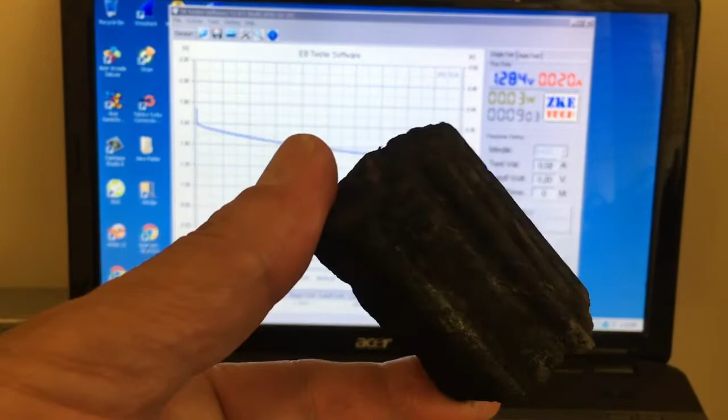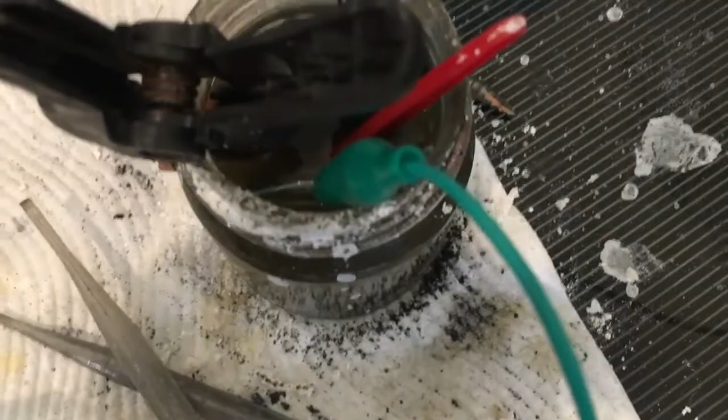This is one of those red-hot charcoal fired briquettes. I put these on top of the feather carbon when I was making that, to stop the fumes, so it would have urea and feather carbon fumes all the way through. I took a hacksaw and sliced the piece right down through here to make an electrode, and I was trying to zinc plate it. I jammed it in the old cell, the original liquid. It's got no separator or anything, just a piece of zinc plate on the negative and that cookie connected to the clamp.

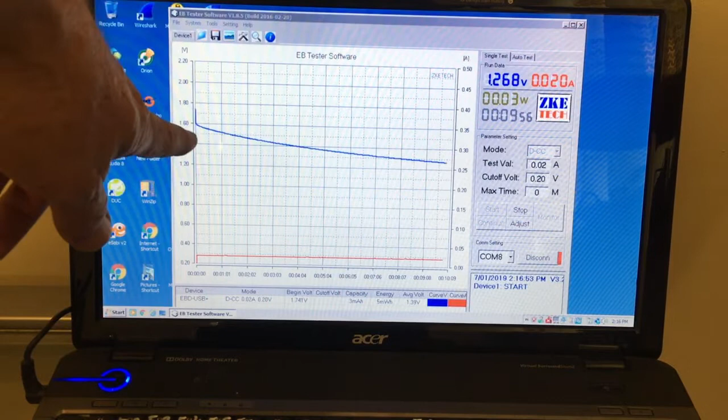I gave it 20 minutes of electrolysis to plate it, then went back to this other cell here to give that another go for charging. It stayed at 1.7 volts. I connected a 20 milliamp load, it dropped to 1.6, and it's currently going for 9 minutes. It's at 1.2 volts.

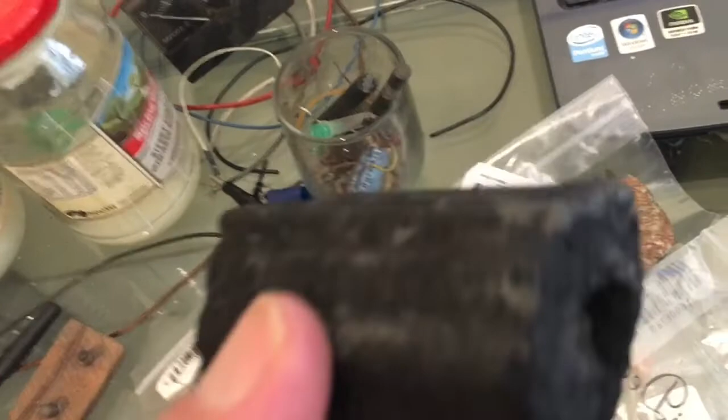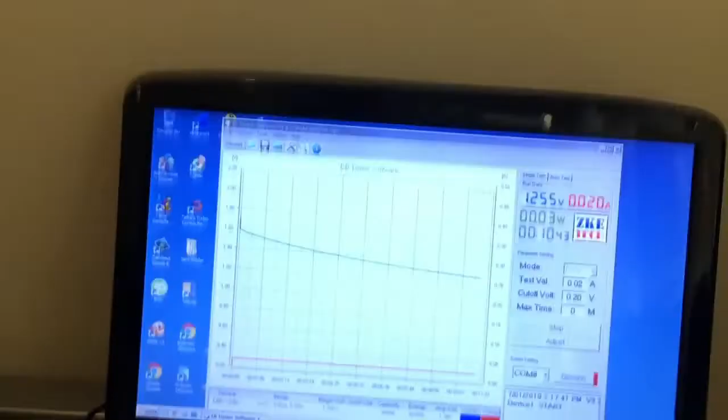So that makes my hexacyanoferrate cell look poor, unless there's some hexacyanoferrate floating around that solution which accumulated onto that positive charcoal cookie briquette. It's very porous through the center of this thing. It's well formed, I guess, and the resistance isn't too bad, about 60 ohms, just putting the probe on one end and the other. It's actually performing much better than my other cell I deliberately made.

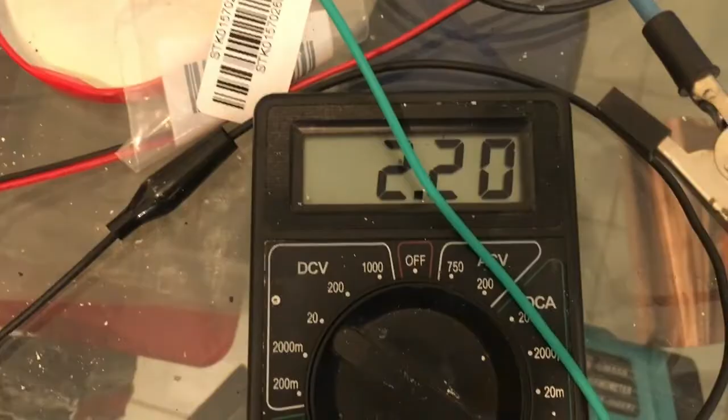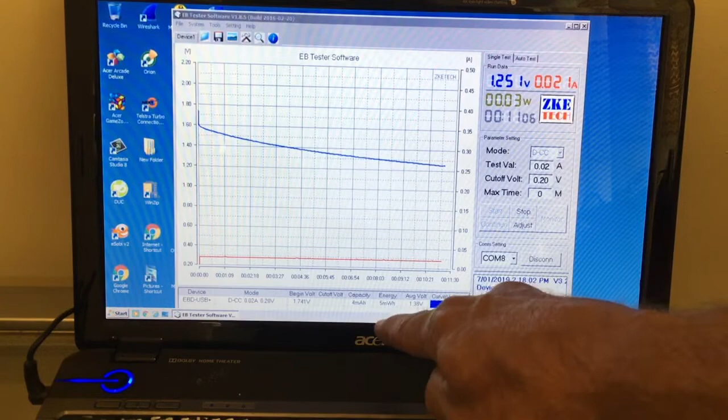Yes. My electrolysis voltage was 2.2 volts. So just out of curiosity, I thought I'd see if it had any discharge, and we're already at 4 milliamp hours and 5 milliwatt hours. So I think if you structure your positive electrodes out of some charcoal form structure with pores going through the center, the surface area is much greater.

Alright, I'll get back. It's holding its voltage quite well, considering it's got nothing to it, no separator, nothing - just old crusty electrolyte which had like 60 charges through it. It went black before I even put that chip in it. Interesting. I might try the same chip in clean electrolyte and see if we get the same results.

So we're at 12 minutes. I gave that cell with the 1 gram of zinc hexacyanoferrate on it a 2-hour charge, and it broke down near 1 hour 57 minutes and started shorting out, only running for 12 minutes and delivering 3 milliwatt hours and 4 milliamp hours. This one's blitzing it.

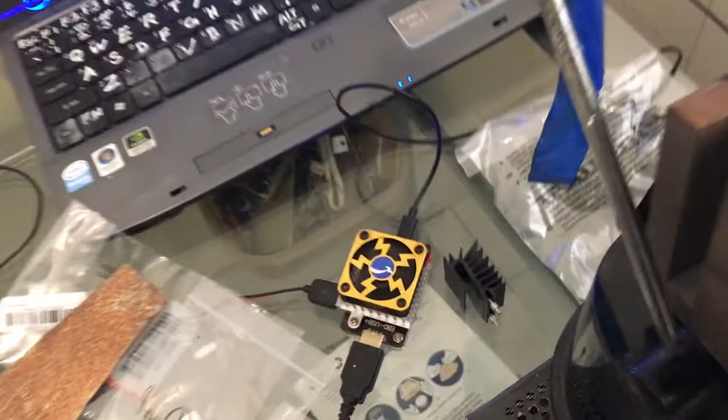Alright, I'll get back when this one finishes. Oops, one more thing - I got a whole bucket of them. I put all of them in there with the feather carbon and urea mix. Some of those silver ones probably are much better, they're at the higher end of the chamber, I'd imagine.

Well, the cell's still running, 23 minutes, and it's still at 1 volt. It's beat all of my battery cell tests to date.

What I suspect is going on - what was floating around in that electrolyte was the zinc hexacyanoferrate particles, and when I put that charcoal cookie briquette in there and added charge to it, it just sucked it all into the pores, I'd imagine.

Unless this is just some sort of freak run. I'll give it an hour's charge after this discharge and see what we get out of it. But so far it's done 8 milliamp hours and 11 milliwatt hours on a 20-minute charge.

So who needs to get all technical about making a battery? Just stick the zinc hexacyanoferrate into the liquid, use zinc sulfate, 1 molar, and charge it with a charcoal briquette. Surprising results.

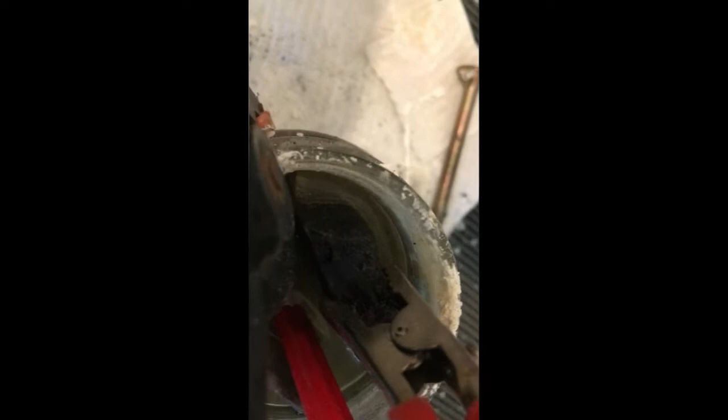Well, an hour and 45 minutes, 0.667 volts, 36 milliamp hours and 34 milliwatt hours. Alright, till the next update.

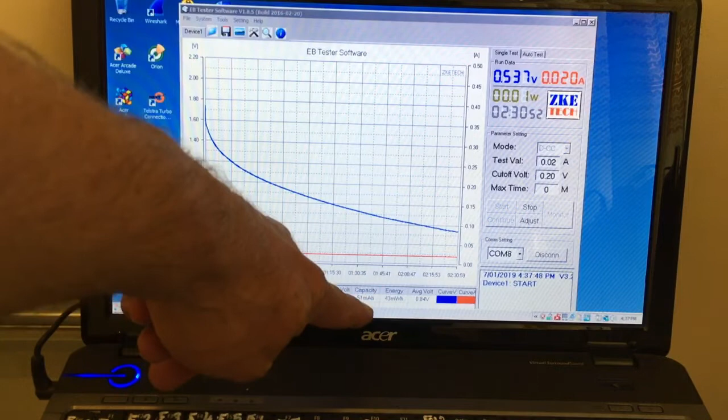Okay, I'm calling it for this battery. I'm going to give it another recharge to see if we can duplicate these results. They're crazy. It started off at 1.7 volts, 51 milliamp hours, 43 milliwatt hours and 2.5 hours runtime, and we're still at 0.537 volts. And the cell's just crudely constructed.

There's a massive gap between the two plates. So we'll stop it and see what the voltage bounce back is. It's going up slowly, and we'll check the plates.

So the carbon cookie, it's pretty big though, I guess. It doesn't look like anything's going on in there really. It's about that fat, say 10 mil fat by 30 mil and probably about 70 mil long, but the electrolyte stops under there.

And the zinc plate was the crustiest piece of zinc plate I could imagine. That was that first test. See, it's still got the ripples and I didn't even clean it off. I just left it as is. Doesn't look like it's decayed anymore.

Still got those marks where we had the first test cell of the zinc hexacyanoferrate solution. That was the contaminated cell. So this electrolyte was the contaminated one, if that makes a difference. If we can't reproduce it in that cell after, it will probably be something to do with the contaminated version, the Prussian blue maybe. So we bounced back to 0.7.

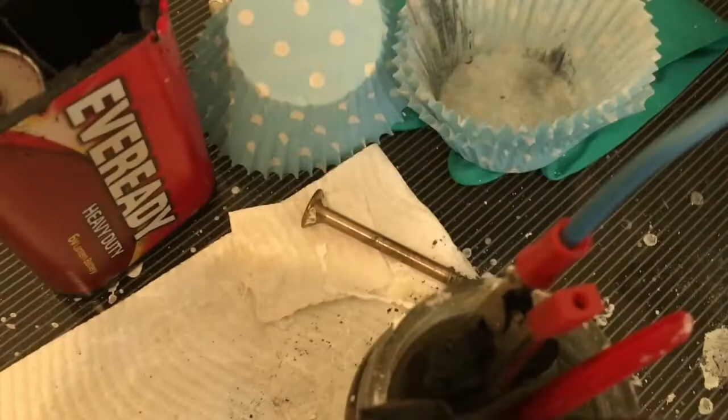I only just discovered this because I was going to electroplate the zinc onto that carbon to make a zinc plate. Now I thought I might as well give it a test after I gave it an hour, half hour or so, of voltage to deplate it.

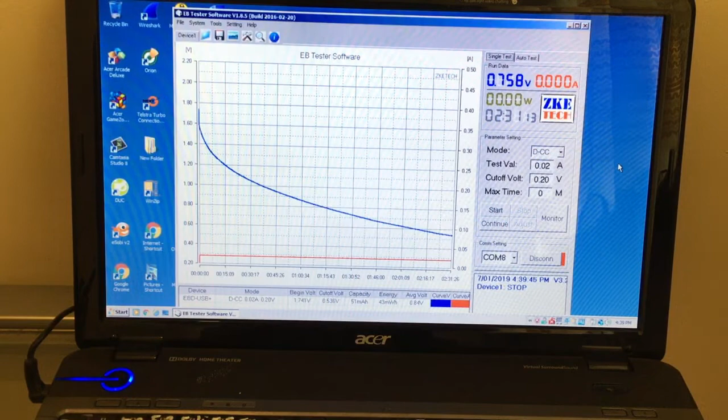It wasn't really plating well. Alright, I'll set up the data logger so I can charge, and I'll get back when I set up the charge. Okay, I'm ready to start a charge.

We didn't bounce back much more than 0.7. I'll set the monitor. I'll connect the charger. We should be at 2.2 volts or something. 2.1 there. And the multimeter connected to the charger is 2.19, 2.18. 200 and something milliamps going through the cell.

Alright, so I'll be back in about half an hour and see if we can reproduce that result. I don't think it can surely be that again, 51 milliamp hours. If it is, that actually beats the manganese dioxide version, which is to the left of that cell, and that's the second attempt at the zinc hexacyanoferrate cell, which ain't too good.

But that had a piece of printing paper as the separator this time on that cell. Alright, fingers crossed.

Okay, the second charge for the carbon cookie, we're at 35 minutes on charge and we're still at 58, it's dropping still. Milliamps, that is.

And we should see it drop in a second or so. I might give it a little bit more charge. I'll go 40 minutes. Alright, I'll be back if it drops or it doesn't.

Okay, the current is still dropping, but it's been on charge for 50 minutes at 2.2 volts. The voltage has stayed steady. We're just getting a few bubbles popping out of the top of that carbon every now and then. There's nothing sort of noticeable in the liquid for outgassing, so it's not too gassy. I'd say there is, but we just can't see it.

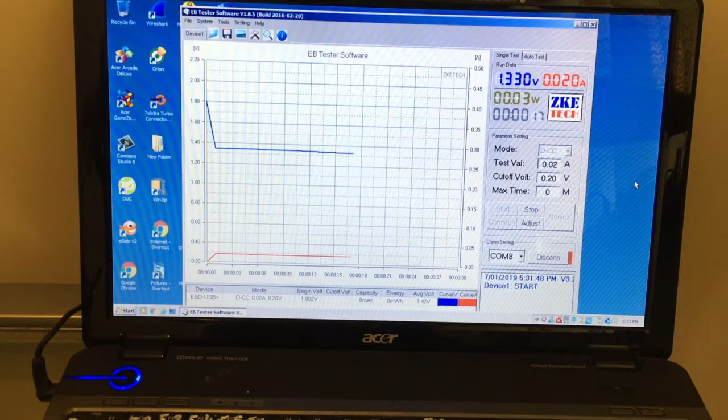Alright, I'll get back. It's sort of exhibiting an overcharge sort of dilemma. It was going down and then it sort of raised in voltage and now it's jumping. That's how the other cells happen to work when they get overcharged. So it might have stabilised. Looks like it, we're not increasing now.

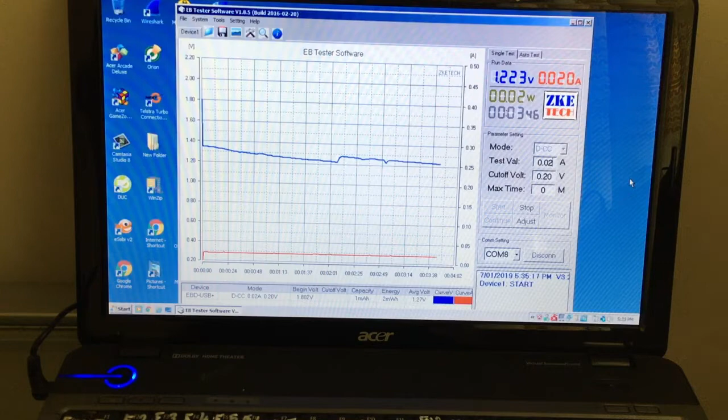Alright, I'll get back. Okay, it's doing that thing again, it's raising. Could be a carbon cookie, that alligator clip connected to it might be getting loose.

Alright, I'll be back for the next update. Okay, the cell's made it for an hour. At 0.7 volts on the last run we were at an hour and 18 minutes. So somewhat it may have not had enough charge perhaps.

I could have charged it for, I was electroplating anyway, and then I didn't set it on the data logger to charge it. I thought it was about half hour to 45 minutes, might have been an hour and a bit. So I'll let it still run, and tomorrow I'll give it an hour and 30 minutes charge and see if we get any different. We're sort of on schedule, about another hour left, 20 milliamps.

So looking still okay, a bit wobbly this time in its results. Could be a bad contact, I'm not sure. Alright, I'll be back.

1.5 hour update on the cell. 0.6 volts, 31 milliamp hours and 26 milliwatt hours. Still looking not too bad, it's in the ballpark of being a good cell.

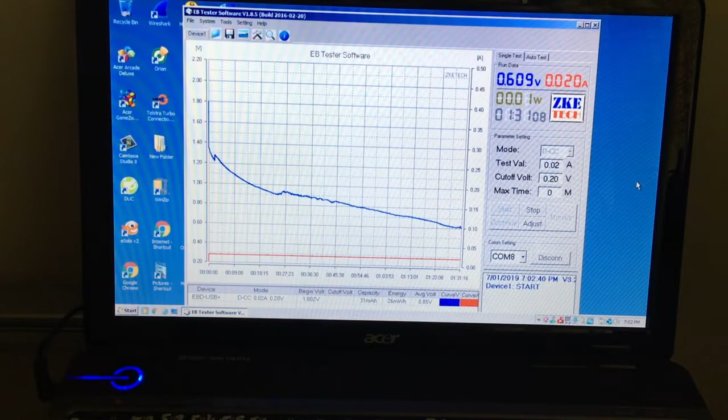Alright, until it's done. Okay, the cell's made it for 2 hours. We're down to 0.53, I think we were 0.54 before. And we're a half hour short of the other one. That could mean we didn't charge it up for long enough.

So tomorrow I'll charge it for an hour and a half and see what we get. Our milliamps is 42 milliamps, 33 milliwatts. We're down on the milliamps, we were 51, so we're 10 down on that and 10 down on the other. It was about 43 milliwatt hours and 51 milliamp hours on the first run.

So I'm just stopping this and we'll check the voltage bounce back. We're about 0.7. Oh yeah, we're bouncing back pretty well, maybe a bit quicker.

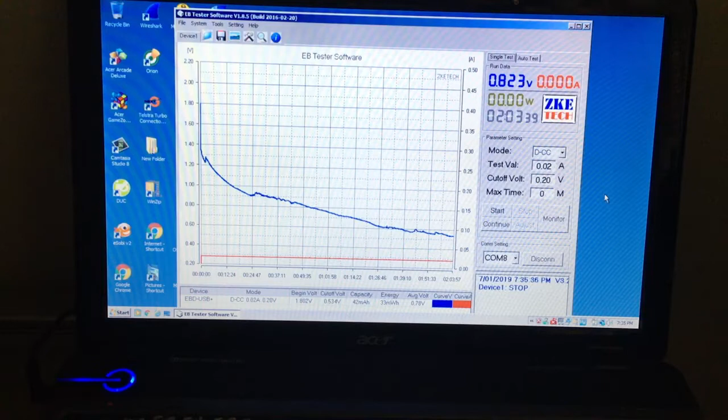So there you go. Alright, so tomorrow I'll charge it up for an hour and a half and we'll see where we sit. If it works tomorrow I'll post a video, I guess. I'll post it anyway, so it doesn't matter. Alright, till then.

Okay, I'm back the next day. The cell's been on charge for 2 hours and 12 minutes and it's slowly dropping, very slowly actually. Voltage hasn't raised much, in fact it might even be going down.

So I'll just disconnect the charge and connect the data logger to the other end of the tester. Okay, and where's my lead? Alright, we should have a voltage now.

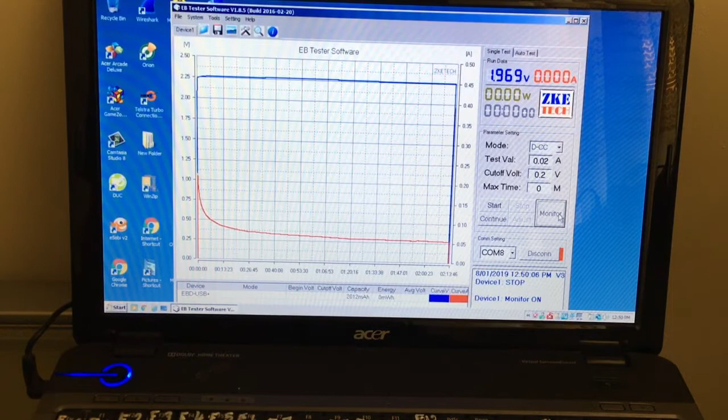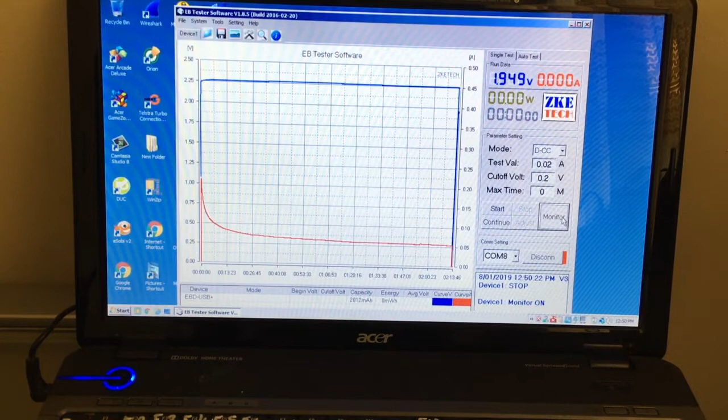Yeah, alright, we're up a bit higher today, we're at 1.9, there's a massive gap. After this run, I'm going to put a paper towel and squeeze them up together and see what happens, but I won't charge it for an hour. So this is just to see our power density in this cell after the next day, because the second run was a bit lower, but I might have been a bit less on charge.

So here we go, we got 20 milliamp load and starting. Alright, it's looking promising, it's holding 1.8.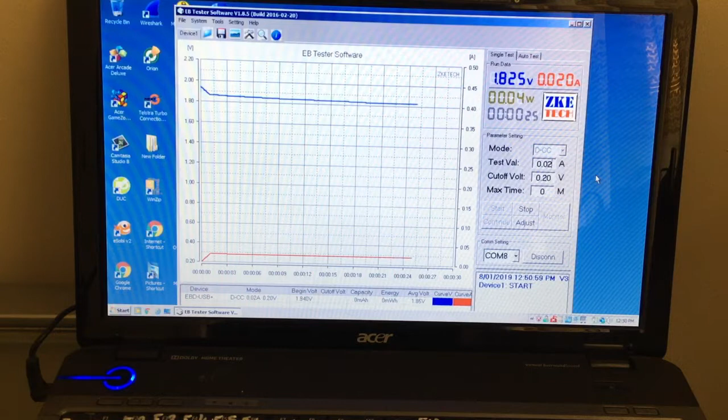Alright, I'll get back. We're doing 4 milliwatts. 22 minutes into its discharge cycle and it's holding fairly strong, 1.4 volts.

Voltage I've noticed drops really slowly. We're at 8 milliamp hours and 12 milliwatt hours. Alright, I'll get back. Okay, back 52 minutes and we're still at 1.174 volts, 18 milliamp hours and 25 milliwatt hours.

There's no off-gassing. And look how hot, strong that voltage stays for. It's not even dropping.

Oh yeah, just dropped then. One.

Alright, I'll get back. Okay, the cell's now at 1 hour and 40 minutes, 34 milliamp hours and 42 milliwatt hours, and holding 0.986 volts.

It's jumping up and down a bit, so it's holding firm, and it's actually looking alright. So the first charge I must have done it for over 2 hours. I just wasn't expecting to do a charge, it was just electroplating. Well, it wasn't electroplating, it was forming.

Alright, I'll be back in another update. Okay, back for a 2 hour and 8 minute update. The cell's still going, holding strong at 0.9, 43 milliamp hours and 51 milliwatt hours so far. And if you can see the voltage, it's just holding firm. It's sort of like sitting around 0.9 volts for 20 milliamp load.

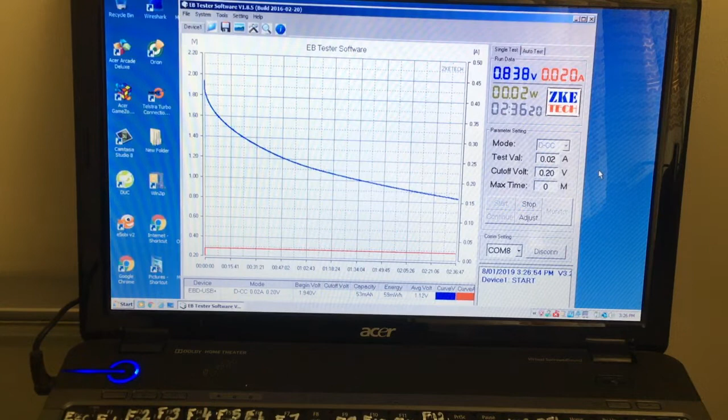Alright, I'll be back. Okay, the cell's now at 2.5 hours or 2 hours and 36 minute runtime, holding 0.838 strong, 53 milliamp hours and 59 milliwatt hours.

So I must have charged it up or was doing my electroplating for around about an hour and 20 to an hour and 30 minutes, because 2 hours and 12 minutes charge time has already yielded that run time we had before. It was down to 0.5 at this time. And I think the cell could actually take a longer charge because it was still like 55 milliamps.

So, interesting. I'm not sure if it's due to the size of the carbon chip on it though. That's a lot of carbon. But quite interesting results. It would be probably my best cell to date, I would say. Definitely.

Alright, I'll get back. The cell is now at 3 hours and 8 minutes, 0.766 volts, holding well. Oh, it just went up. 64 milliamp hours and 68 milliwatt hours. Still looking good.

Alright, I'll be back. Okay, 3 hours and 31 minutes run time so far, holding 0.721 voltage. Phone must be getting full.

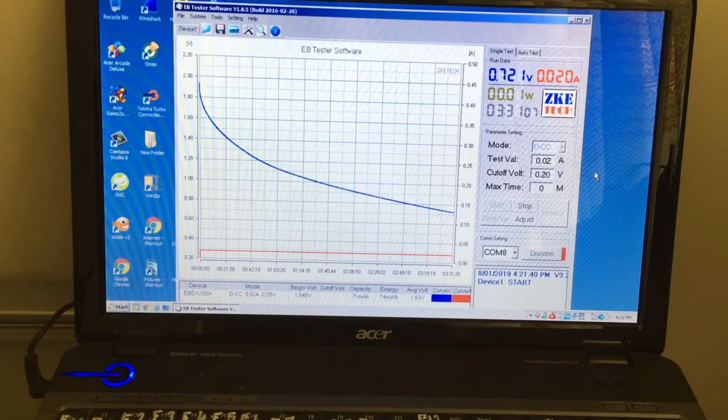Okay, I freed up some memory on the phone. 3.5 hours run time, 0.7 volts and 72 milliamp hours and 74 milliwatt hours. So the cell's still holding strong.

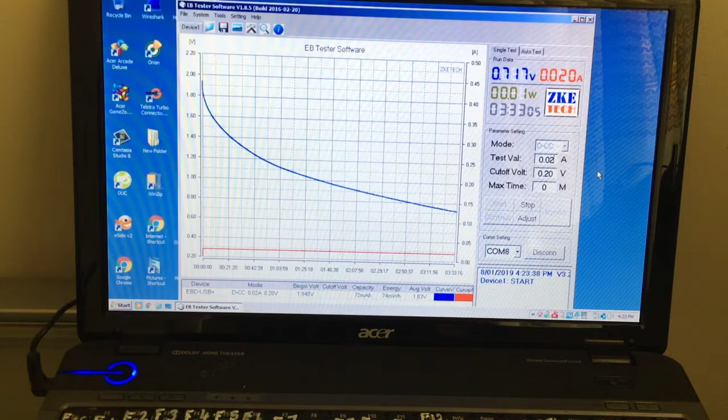And the cut-off voltage will be 0.5 as the other ones. I'll get back when that actually runs out. Okay, cell's been going for 4 hours and 6 minutes. So we're at 0.6 volts, 83 milliamp hours, 82 milliwatt hours.

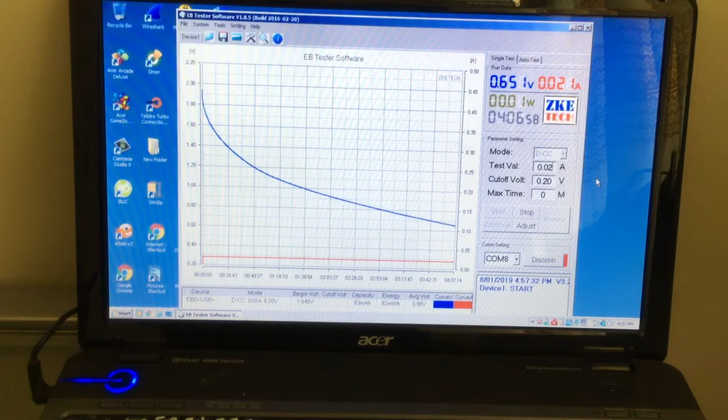And probably another half hour maybe. Alright, I'll be back. Okay, 4 hours and 35 minutes, it's at 0.6 volts, long day, 93 milliamp hours and 88 milliwatt hours.

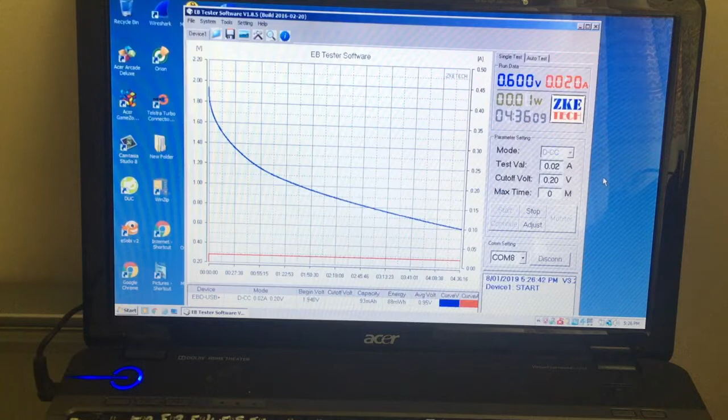Alright, I'll be back. Okay, we're down to 0.55 volts, 5 hours and 8 minutes and 104 milliamp hours and 95 milliwatt hours. For this run. I'm shutting it down, we're not going to probably get much more.

We may. It's holding pretty well, but I gotta go out and I'll post the results of this 3 charges, and I'll continue working on this cell, I reckon, because it seems to be worth it.

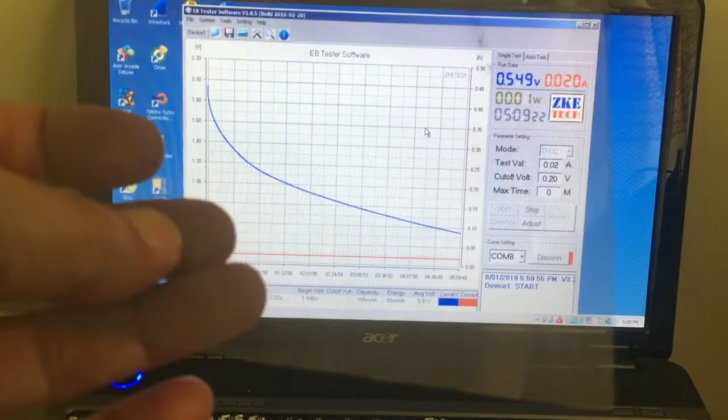I'll see if it responds with, if you can sort of see it, a stainless steel mesh as a collector plate perhaps. It may actually improve the results than just having an alligator clipped onto the top. That way we're collecting from the whole surface of the carbon.

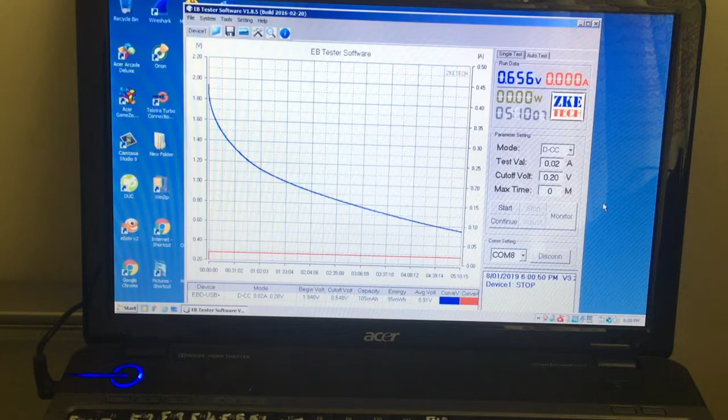Forgot to do a voltage rebound a bit, so stopping the test. And we're rebounding quite well. I might see what the voltage is tomorrow, left overnight, and a short circuit, I guess. So I'll see you then.

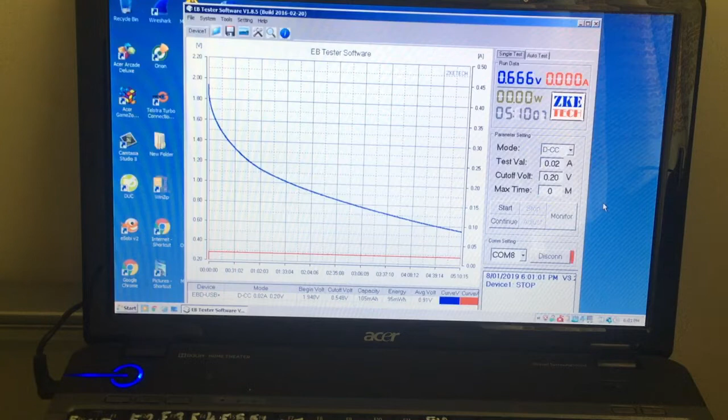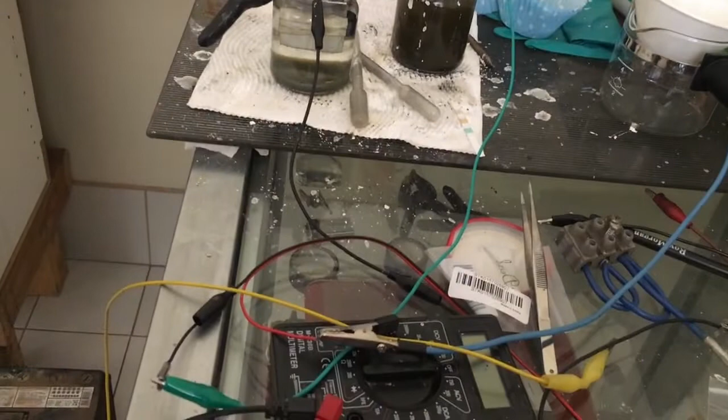Okay, back 18 hours being idle. The cell's at 0.9 volts, and for a short circuit, before we give it a charge, it's on the 200 milliamp range.

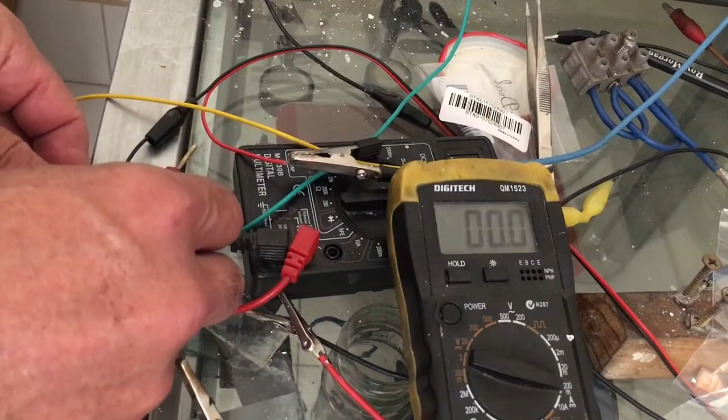And short circuiting now, we're about 50 milliamps or something. So still not a lot of power in the cell after a 5-hour discharge.

And I'll start the monitor. Well, first I'll connect the lead. I'll give it a 2.5 hour charge or something, and run 100 milliamps I reckon today for a test, just to see what happens.

That will appear on the next video though. Oops, don't have the power supply on. Okay, we should jump up to 2 volts. No, what's happening?

No, maybe the data log is broken. No. No voltage. Alright, I'll sort that out. There must be something to do with the charger. I'm getting 2 volts, but it's not going through the cell.

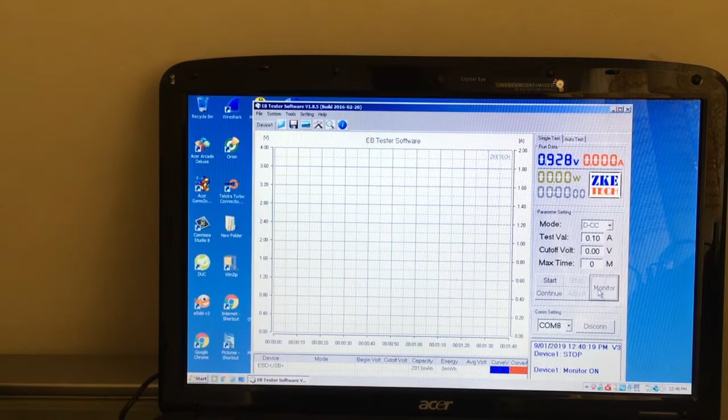Cell could be damaged. What's going on? Alright, well, that'll be it. I'll connect the charger and see what's happening. It was just the data logger collapsed.

See, now we got 228 milliamps. Yep, set the monitor. Right, okay, we're all good to go.